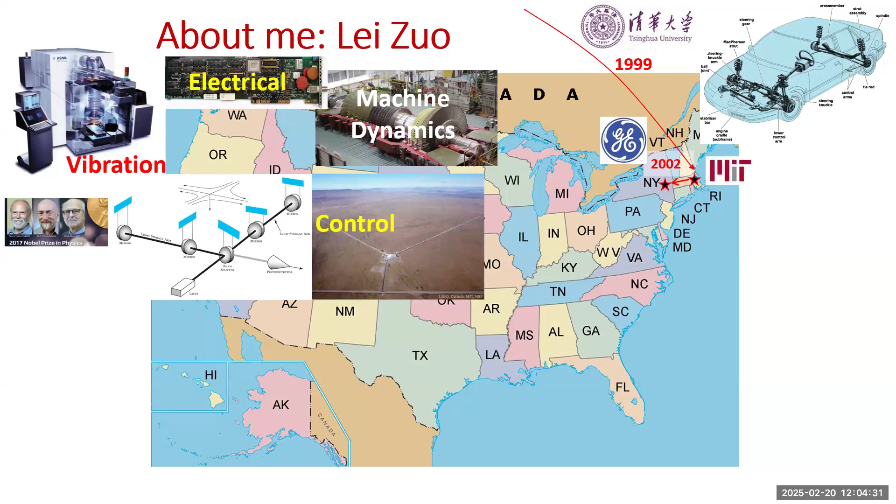So then after finishing my degree, I went to work at a pharmaceutical company in Chicago. There I worked on robotic systems, something like a benchtop chemical reactor, and some projects like brain signal recording, neuron signal. Then I returned to university - first Drexel, then Virginia Tech, then Michigan.

So wow, all this experience, right? Why am I here? When I came back in 2008, I worked on vibration energy harvesting and electronic systems. Then I was center director of the Virginia Tech Energy Harvesting Center. Then I came here. My lab is the Marine Renewable Innovation and Education Lab. So you see my background: car and vibration control, machine dynamics, electronics design.

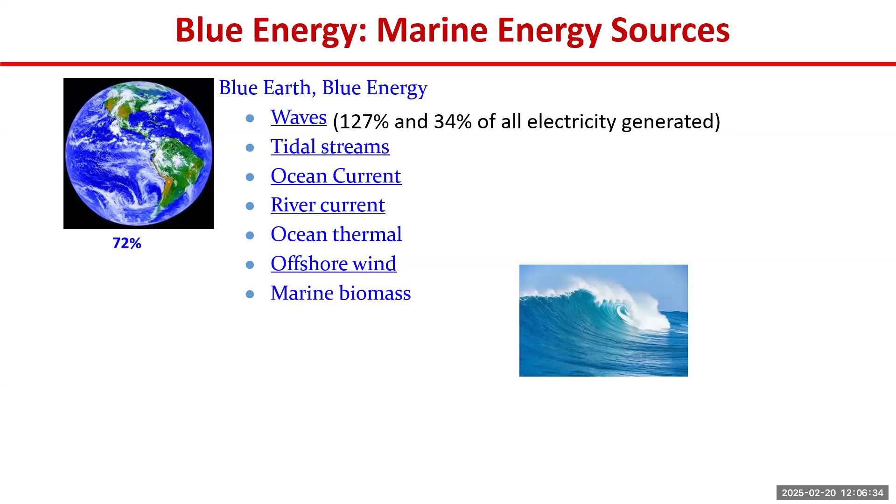Here we talk about marine energy, fluid flow and like that. This picture shows in blue color marine energy using wave, tidal, ocean current, river current, ocean wind, even biomass, right? Given the fact that human beings only act on 30% of that - 70% is water - there's a huge resource we could use. Take ocean wave as an example: wave along the US coastline could power the whole country, considering techno-economic feasibility - especially on the technical feasibility side, we can get 1/3 of electricity from ocean wave. The potential is huge, right?

That is from Falnes, the pioneer, in his published paper. So compare this with solar: when you put solar in the sun, the sunlight is about 1.5 kilowatts per square meter, but accounting for efficiency, you get a couple of watts or a couple hundred watts per square meter. So I want to say wave energy is 10 times denser.

The density is 10 times more than solar.

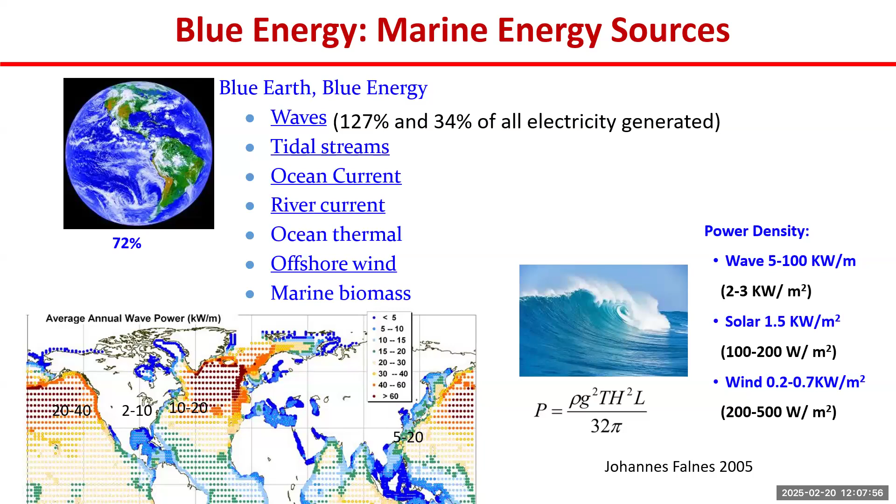The United Nations defined the decade of ocean science for sustainable development. The World Bank has a vision about blue economy, which is basically sustainable use of ocean resources. It includes marine transportation, fishery and aquaculture, and alternative energy from ocean wave, ocean current, biomass, and similar things.

The United States Department of Energy has a vision for powering the blue economy. We can get energy from the ocean, and we can power underwater robots, power fish farms, power seawater mining, power isolated communities, and power water desalination to fight disasters.

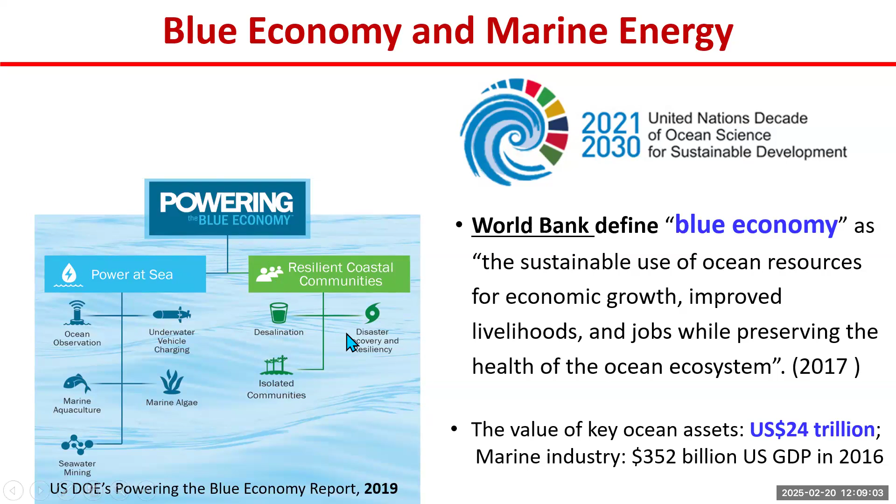Let's talk about ocean wave energy. The first patent was in 1799, in France. For 100 years there was not much progress. In the 1940s, a Japanese researcher used ocean wave energy to power a lighthouse.

Ocean wave energy is driven by the oil price. When the 1970 energy crisis happened, and the 2000 energy crisis, now there's another peak. This energy crisis drives people to think about what the alternative energy could be, and ocean wave comes to the vision.

Looking at the number of people publishing per year - they started in the 1970s, and by 2008 there were already hundreds of papers. Now, in one year, you can probably find 2,000 papers - just imagine every day 3 new papers. This gives you a sense of how active wave energy research is.

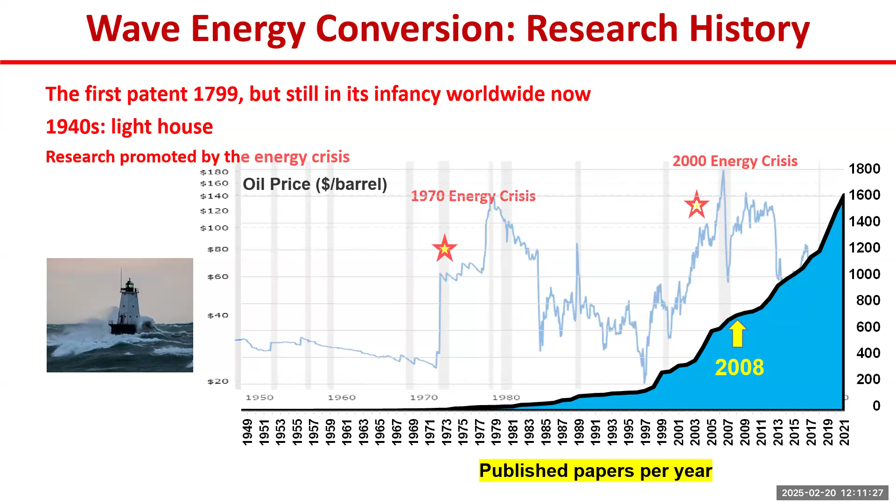2008 was an important year - not because I came back to university, but because in 2008 DOE made its first call for proposals on ocean wave energy and invested $9 million. In 2016, DOE created the Water Power Technology Office with a budget of 45 million.

This figure gives you a sense about the spending. In 2024, last year, it was 141 million dollars. In the first 10 years, this data shows they put 38% of the money to support industry, 1/3 to national labs, and 1/4 to universities.

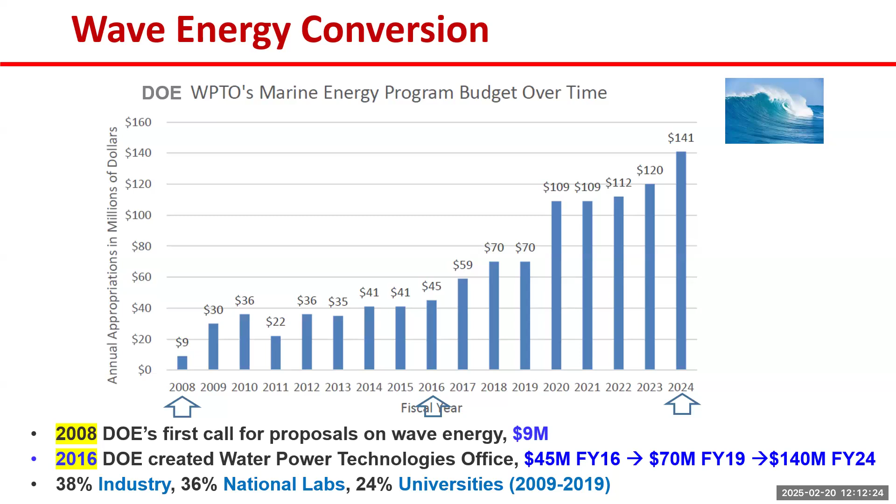After 2019, I feel they invested more on the national lab side, though I don't have data for that. So even if you add together how much we spend, however, if we now talk about ocean wave energy, no one knows what that's about.

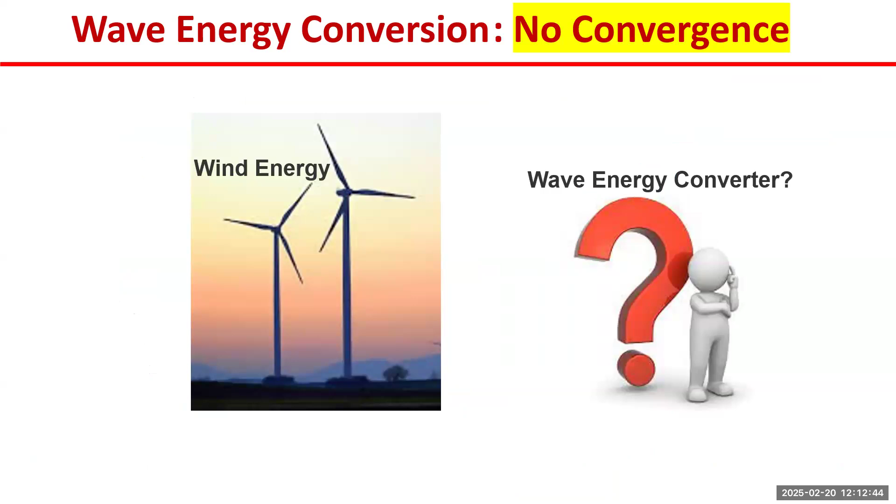Ocean wave energy is different from wind energy. If we say wind energy, you have big towers with 3 blades - you know what that looks like. But with ocean wave energy, you have no idea. The reason is there's no research convergence, and there are so many concepts.

One paper said there are 250 concepts, and another paper did a survey of more than 1,000 concepts. No one knows which one is best - there's no criterion to judge which one is best, no widely accepted criteria. Different people present it in different ways.

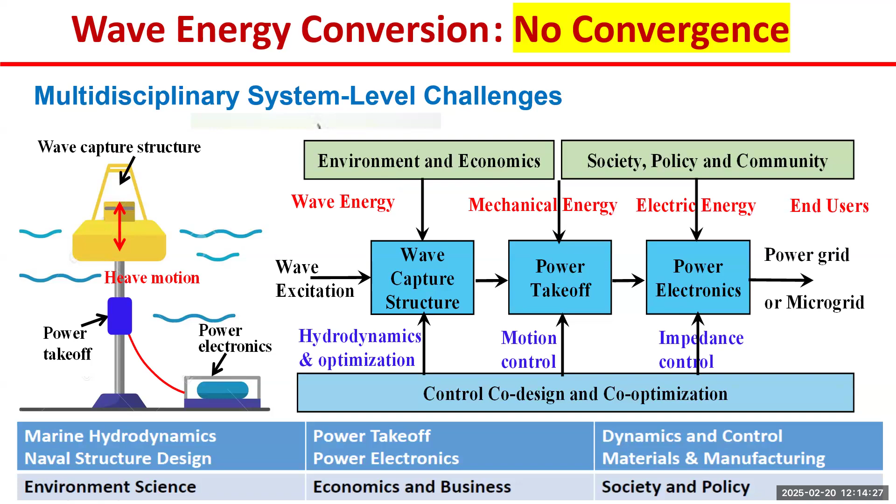However, engineering is not the only consideration - there's also environment, economic, society, policy, and community. So ocean wave energy really needs multidisciplinary research. This is why I'm here - you can see my background includes dynamics, control, electronics, and even machine design, so I want to take my background in this multidisciplinary area to make some contribution in ocean energy.

Later, I got some funding from DOE.

I mentioned DOE 2017, they started the Water Power Technology Office. We got funding to build a 100 kilowatt device, and later we also designed for 100. We did a test in the real ocean, and because it's 100 kilowatts, it's a very large device, 40 to 50 meters.

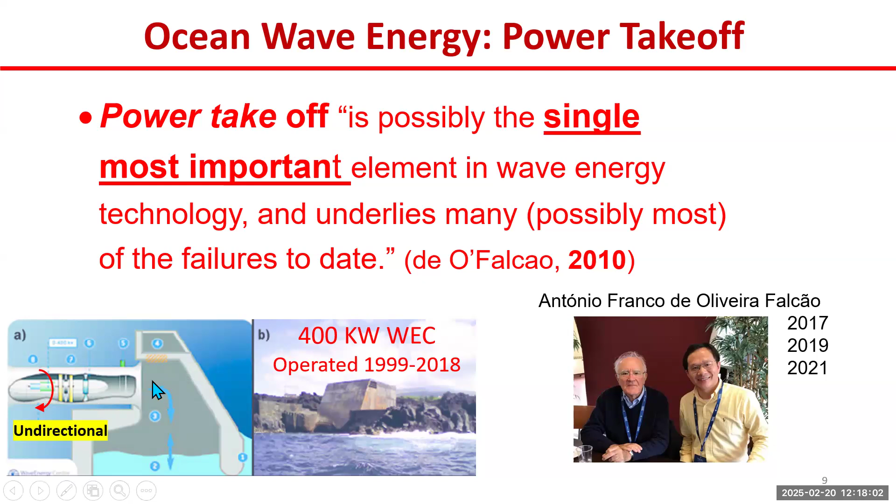It moves up and down, driving a turbine in and out. This is a special turbine that drives the generator into one direction of motion. When he reviewed this, he said the power takeoff is possibly the single most important element in wave energy technology. The power takeoff is the machinery that converts mechanical energy into electricity. Here is a Wells turbine.

Another example: humanity's first trial of a wave energy farm was in 2008 in Portugal. They built a device where wave motion drives a hinge, the hinge drives a piston, and the piston drives fluid. The fluid accumulates in a high pressure accumulator and a low pressure accumulator. They use a check valve to convert the bidirectional motion into single direction rotation. But the device was so complicated that after operating several months it totally failed.

They designed for a 2 megawatt farm. So no matter this design or that design, they want the generator to have single direction rotation, while the wave has bidirectional rotation motion - it can be horizontal or vertical.

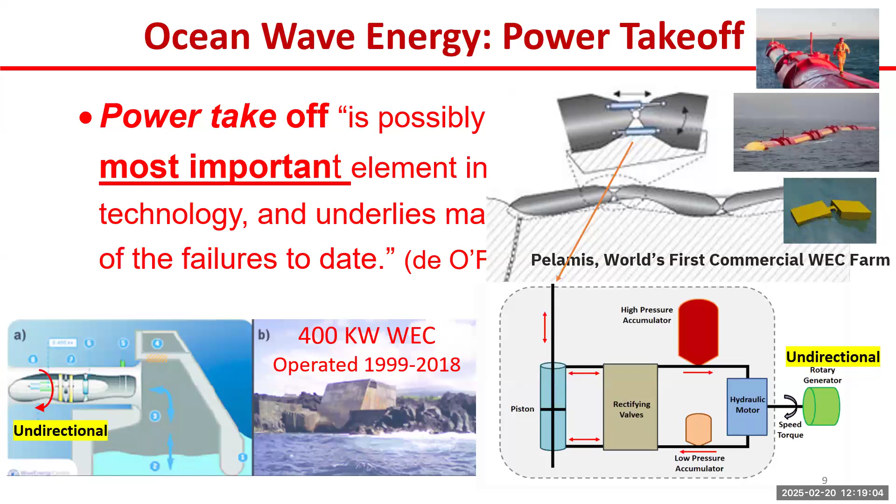Now this is how I brought my design skills into the field and built this kind of prototype. I'll show you first, then show you how it works. You can see this moves up and down, driving the buoy, and we generate energy to power the night light. So what's inside here drives this motion up and down.

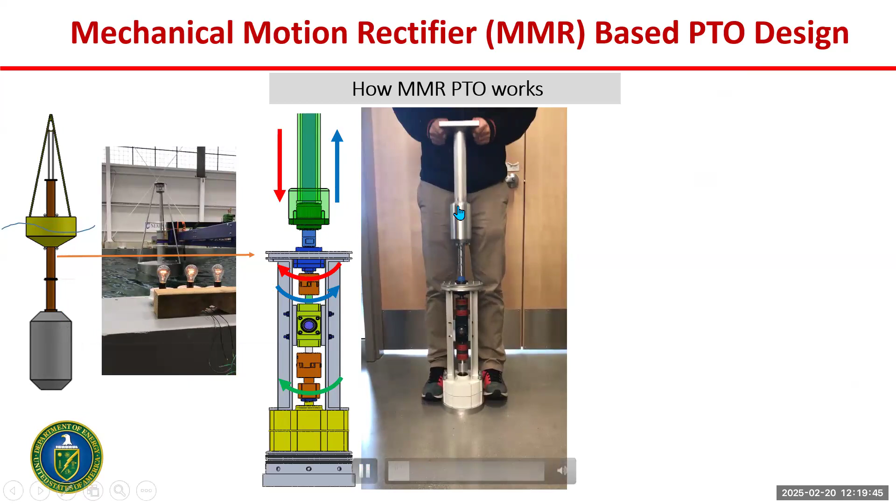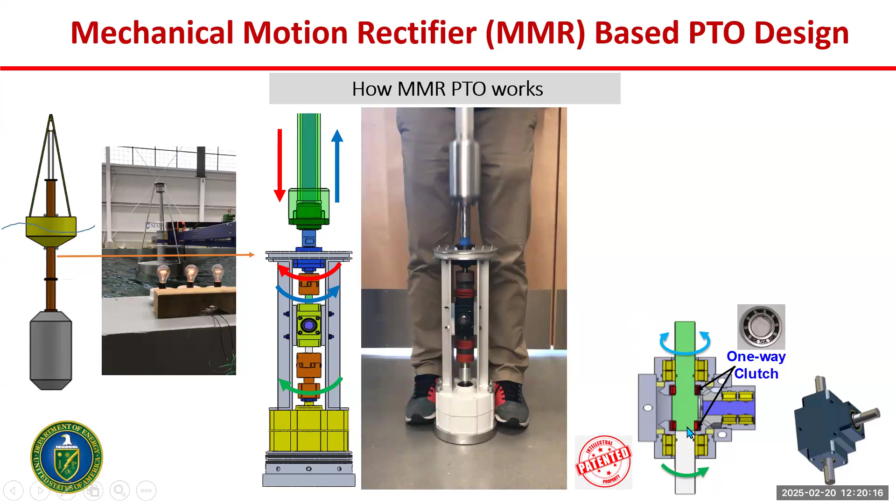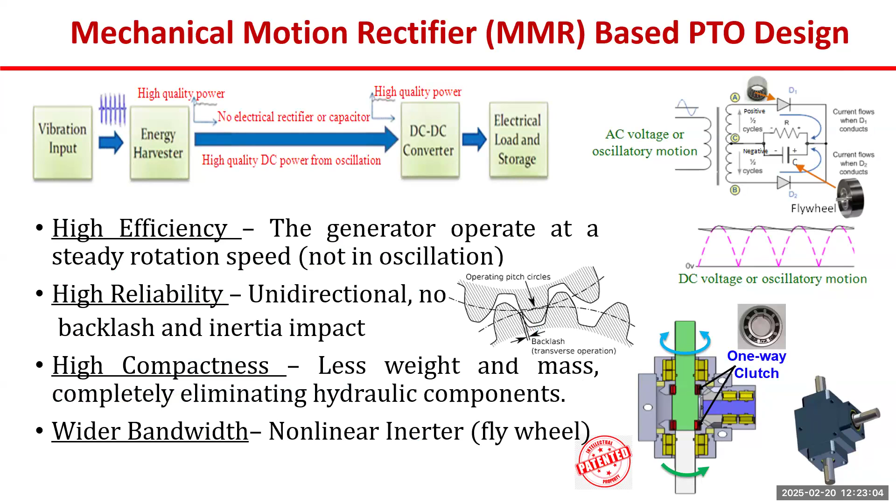Another advantage is this is very compact compared with the hydraulic system. Also, flywheels usually add inertia which hurts our control, but now bigger systems are better because it acts as a capacitor. So then we built these prototypes and tested them 5 meters offshore in the ocean.

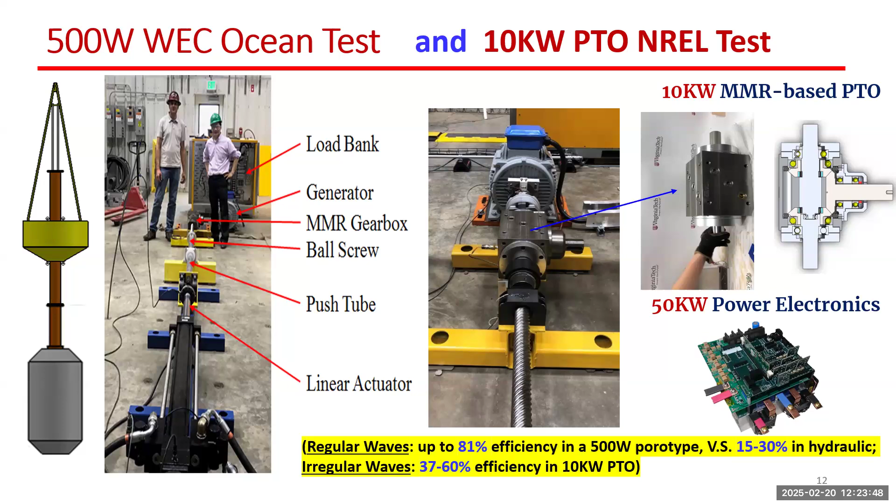Later we also got the chance to build a 10 kilowatt device, with this generator, this gearbox, as well as a 50 kilowatt power electronics system. We got 80% efficiency for this small scale design in regular waves, and for irregular waves we got 37 to 60%.

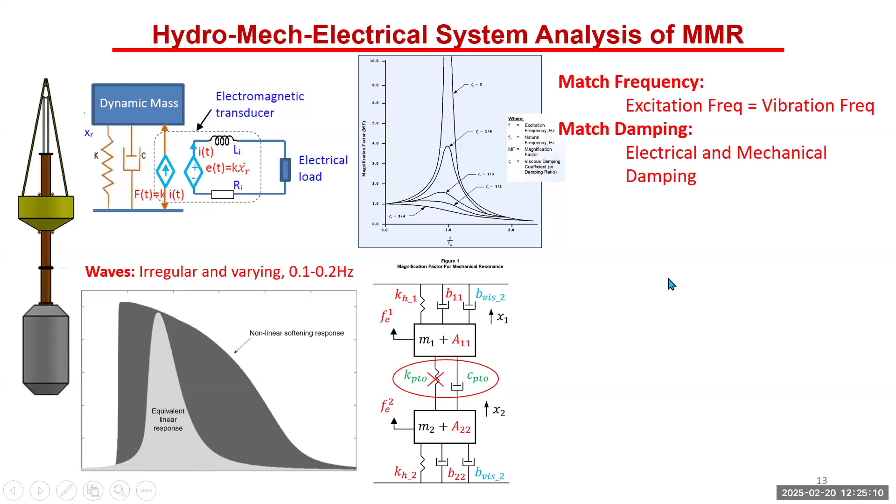Here we introduce another concept: nonlinear mass. What does that mean? You have this moving up and down. Bidirectional, you drive the flywheel into one direction rotation. Clearly, bidirectional into one direction is nonlinear. Another thing, instead of mass, we say inerter. Inerter means when you move this up and side down, there's a force. The force is proportional to the rotational inertia, and it's relative to the relative acceleration between this end and this end.

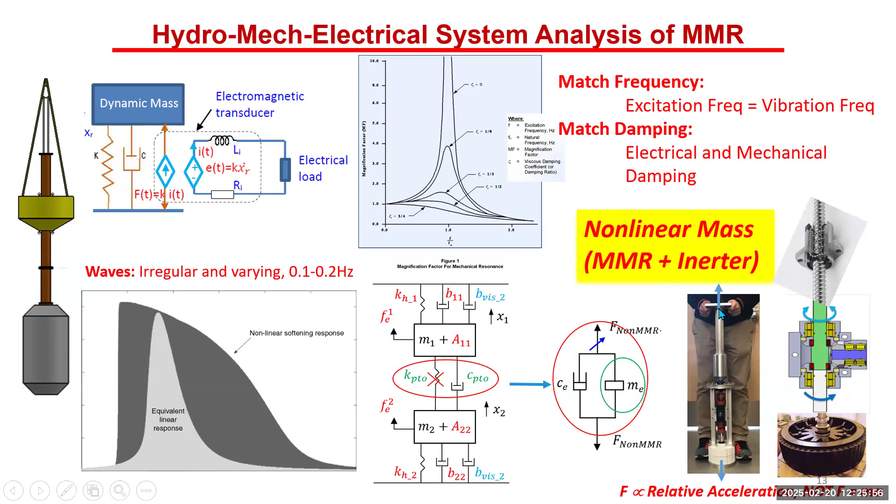So it's called inerter. With this nonlinear mass, we can achieve broad frequency energy conversion, like a two-mass system. You can imagine that way there are two resonances. So now we increase the mass, we get a broader frequency. Another thing is damping and drag damping - this damping effect. If we use a smooth streamline shape, we can decrease the drag, and then we can get a little bit more energy.

So that will give you a sense of how we can use such nonlinear dynamics and also hydrodynamics to improve the power output.

So then in hydrodynamics - the wave energy converter, I said it's a vibration system. In this vibration, there are three unique terms. One is mass, right - mass is added mass. What does added mass mean? Your buoy moves up and down, and the water surrounding the buoy moves up and down also. Such kinetic energy corresponds to the added mass.

The second part is radiation damping. When the buoy moves up and down, it generates waves that propagate out, and wave energy is lost from this buoy. So this is radiation damping. The third is excitation force - you'll encounter excitation force.

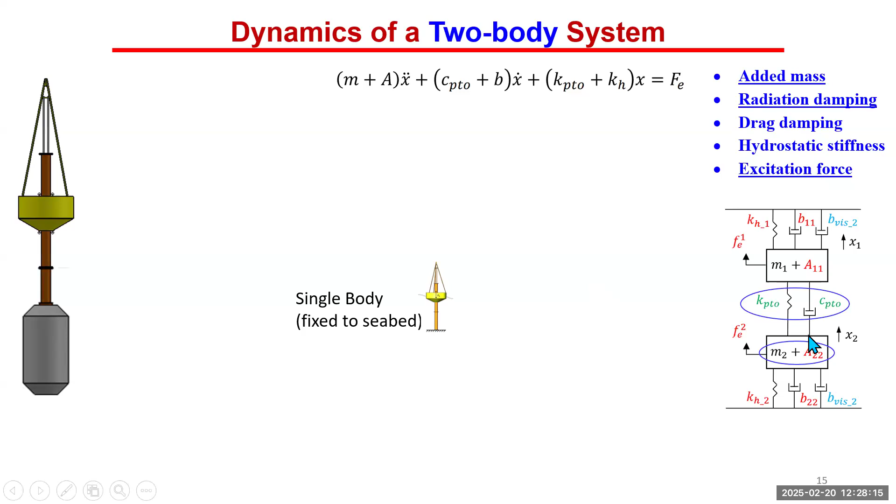Anyway, when you design this, you design the PTO stiffness, PTO damping. You also can choose different mass, second mass. And this is the result we can get - the power output.

So for the single buoy case, that is this case. Or a two-body case, you have different mass ratios. Just imagine that way - if mass is very, very tiny and this moves together, you don't have energy output. And if this mass is very, very large, you'll get the single buoy case. In between, there's the best ratio of this mass ratio. What happened at this best mass ratio? Actually there's physical meaning - it still matches frequency. The only thing is, at this time, the spring stiffness part is zero.

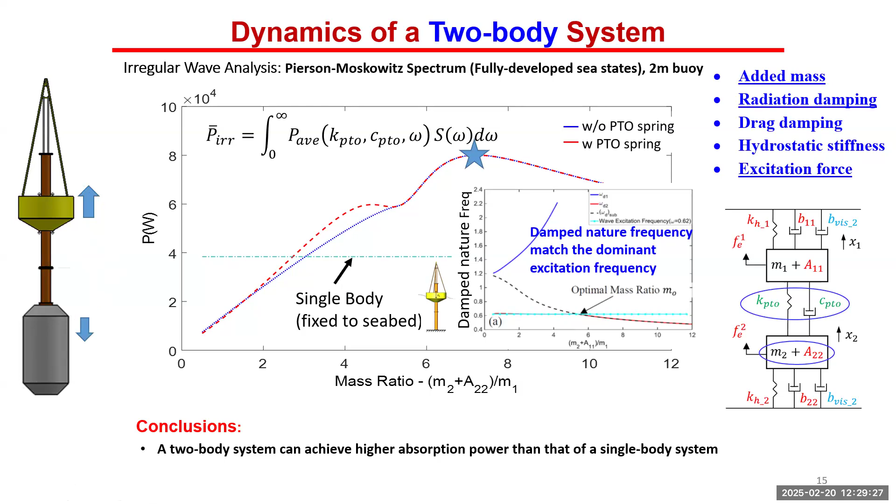We talk about damped natural frequency, and one of the damped natural frequencies matches the excitation frequency. Therefore we get resonance. At this resonance, another thing is the motion shape - the two move out of phase. That means when the buoy moves up, the tank moves down. It generates relative motion, and this relative motion gets more energy output.

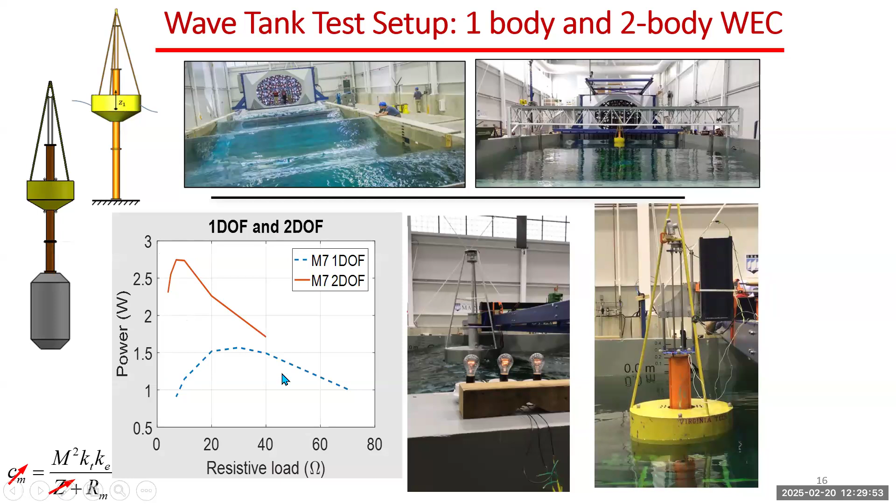So with this tank test, I want to show you this to give you a sense of what I said about relative motion. This is connected to the tank, and this is the buoy. You can see clearly the out-of-phase motion. Because it's out-of-phase motion, the power output can be much more than the single buoy case. So this is it.

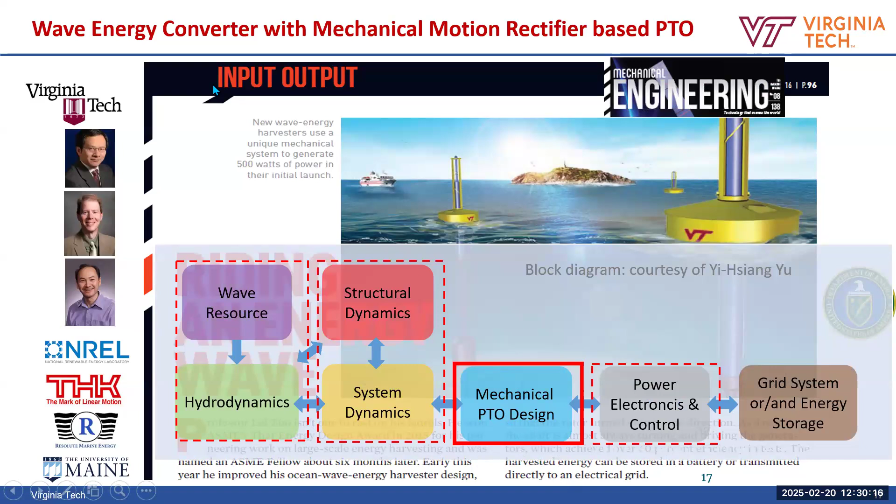We talk about PTO being the most important element. However, once you put everything in the water, you have to consider all the things, from wave resource to structural dynamics, hydrodynamics, and power electronics control. This is ASME Mechanical Engineering magazine's highlight of all our work. Overall, we care about wave-to-wire efficiency, from wave input to mechanical system to electricity output. We have to consider everything.

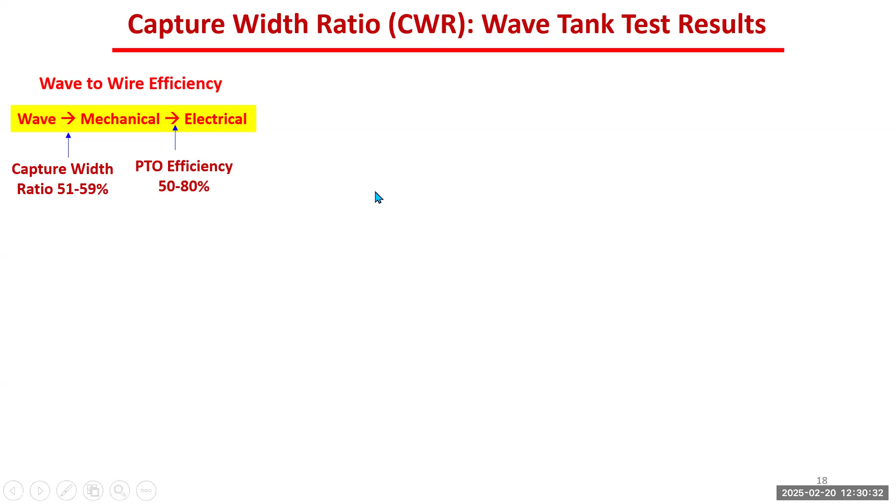So the shape is important, right? Shape is related to capture width ratio. Capture width ratio is how much power input converts into mechanical energy, and it depends on the hydrodynamic design, the shape design. For example, this reference model 3 has been used with a plate, and they add mass through this plate, but this plate introduces extra damping. Here we use a streamline shape, and we can increase the power capture ratio by 2 times. Overall efficiency here, we get about 20% from wave energy to electricity.

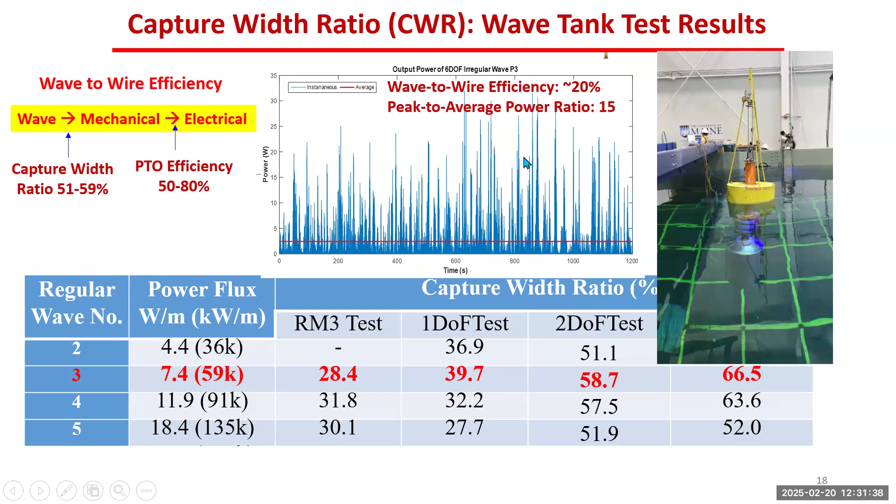So this is the power output in the time domain. Another way to say it: the peak-to-average ratio is very, very large. So you might have an average of 1 kilowatt, but the peak can be 15 kilowatts. This is what I mean. So there's a disadvantage here—you want to make the peak-to-average ratio small. The reason is the peak force corresponds to how large your device needs to be, and that's about money. Average energy relates to economic benefit.

In addition to that, we also did power electronics control. Imagine this generator has an internal inductor and resistor. This is a 3-phase AC to DC converter. Instead of using a diode, we use a controllable switch. Now this inductor becomes part of the AC to DC converter, so we can control the switches and achieve impedance matching.

We talk about impedance matching. Here we have an inductor. If you want a resistor to match this part, it has to complex-conjugate this part, so as a result you'd need to use a pretty large capacitor. With this control, we can achieve cancellation of the inductor effect, taking advantage of this inductor for the AC/DC converter part.

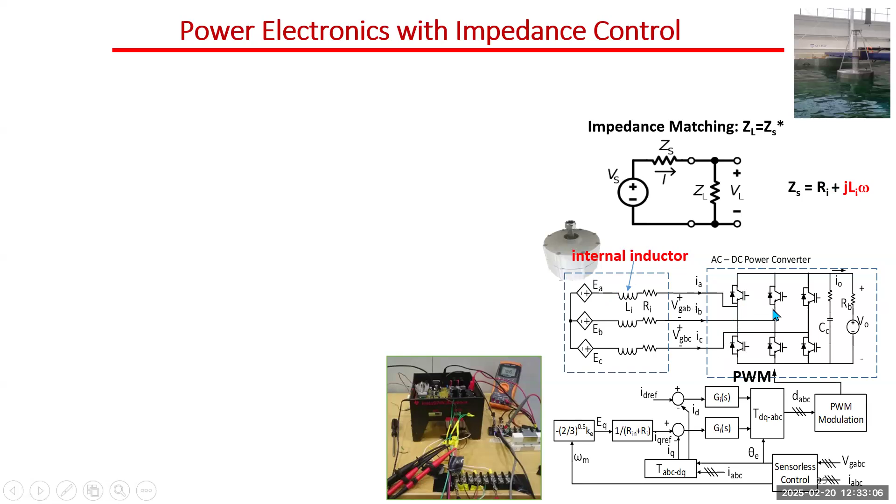Here is an experiment study. You put a resistor here, and maximum you get 10 watts. Here, using the power electronic side in the tank test, we can double the power output. So what I want to say is that the electronics part is important.

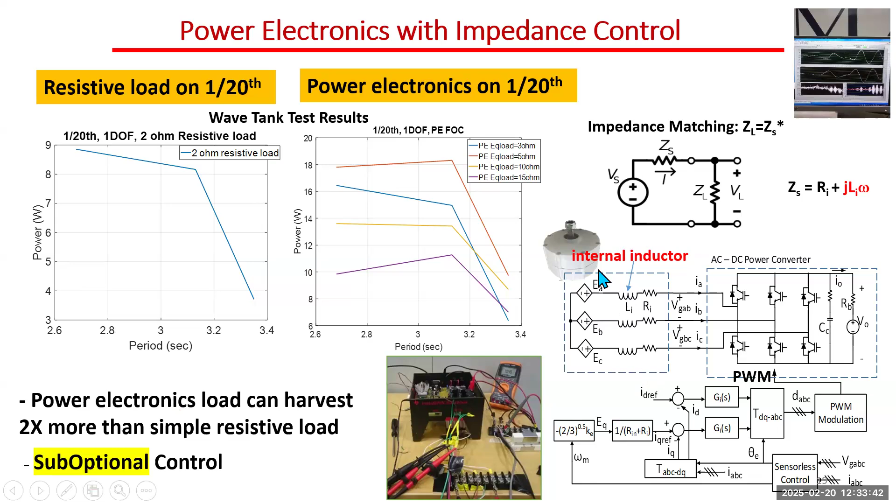But that is still suboptimal control. Why suboptimal? In this system, we only consider the impedance or dynamics of the generator side—we didn't consider the power or the buoy dynamic side. In that sense, the energy only goes in one direction.

So now we talk about the control side. Control usually means active control—sometimes you take energy out, sometimes you put energy back. However, with a one-way clutch, this will hurt us.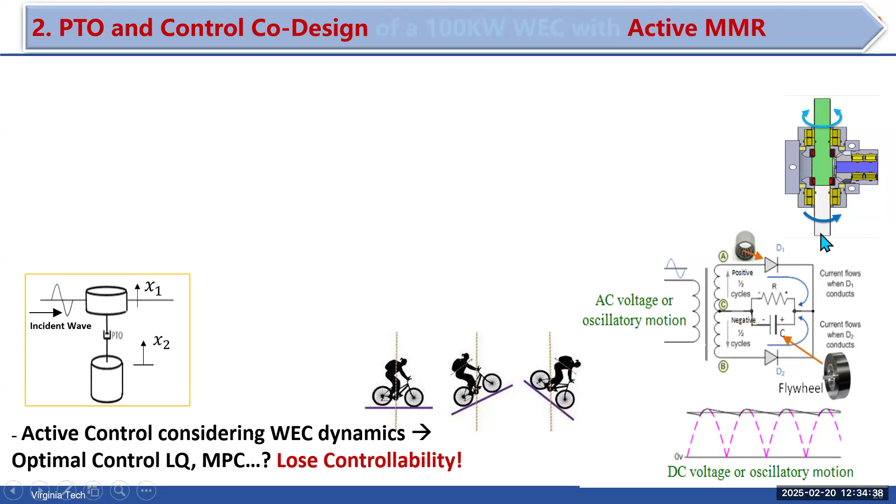Imagine riding a bike: flat road, no problem; uphill, no problem; downhill, you lose control. The reason is your pedal cannot control the wheel. Similarly, when you put this system here—this is the generator, and the upper side is the buoy—your buoy can drive the generator, but the generator cannot drive the buoy. Therefore, we cannot use active control.

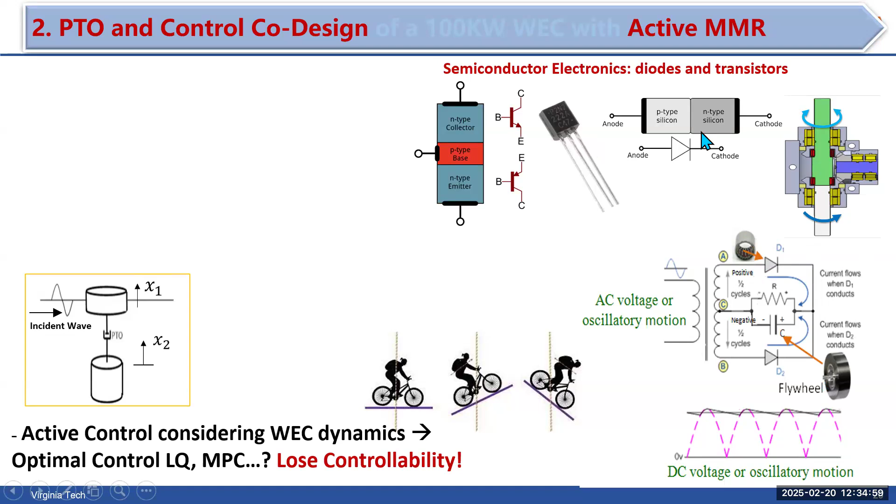So for active control in the electric domain, what we are doing is changing this semiconductor diode into a transistor. Now with this transistor, we can use voltage or current to control the switch on and off. This is the active synchronized electric rectifier.

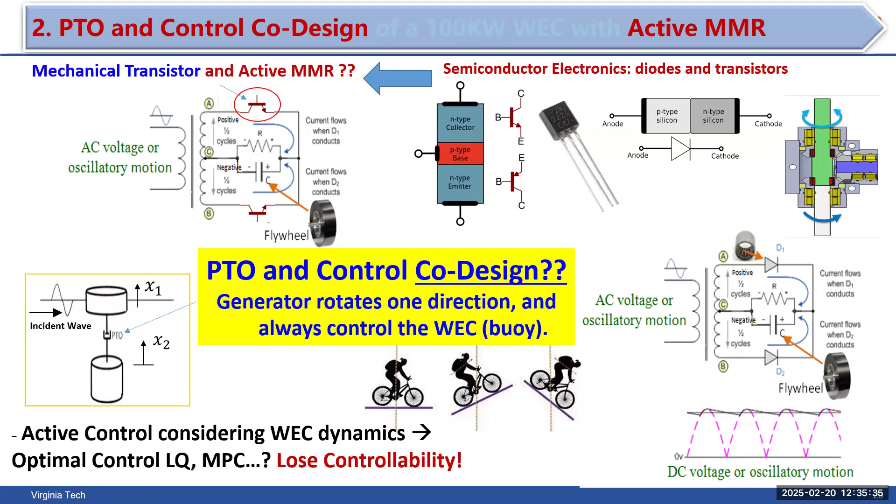Now, can we change this? We can create something in the mechanical domain to achieve a similar active motion rectifier. In that way, the generator always rotates in one direction, and the generator can control the buoy to go up or down. That's the way we achieve active control.

How do we do that? I mentioned I have a car background, so I borrowed another element from the car—the electromagnetic clutch. In a car, there are two types of clutches: one is a manual clutch, like in a manual car; another is an electromagnetic clutch, like for the air conditioner compressor. When you push a button, it engages the compressor—this is the electromagnetic clutch.

Here, we use two electromagnetic clutches to achieve this function. I didn't go through the video fully, what I mean is if this gets engaged, it drives here, and if this moves another direction, we can go through this path. In that way, we can always maintain control instead of losing control.

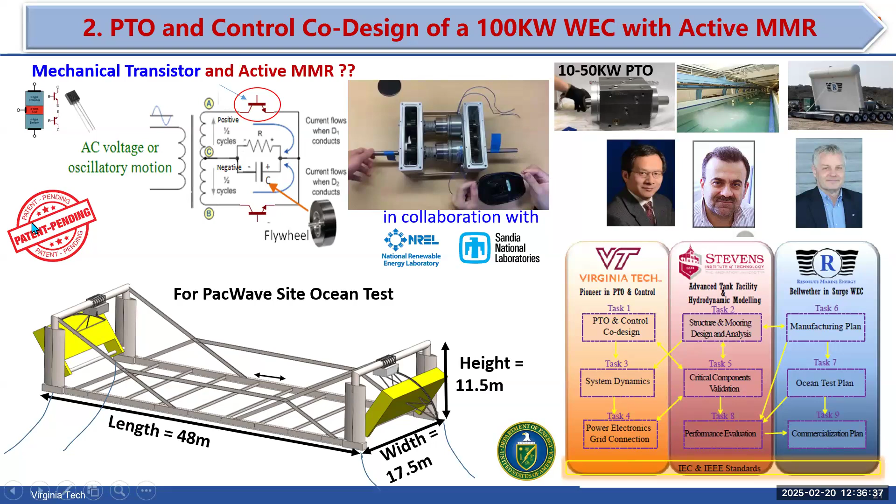So this is another project we work on. As I mentioned, this is a 100 kilowatt wave energy converter design.

In addition to the active motion rectifier, another innovation is the dual flap side. This video shows the result. With a single flap you see almost no motion or rotation. Here with the dual flap, the wave is the same condition, but you have large motion. In that way, the mooring force will be small.

And here, if you can fix this mooring, and fix the bottom, you will see large motion. Now we can use a smaller mooring, so a floating design will be there.

Our third innovation here is about PTO gain. For example, if you have the flap rotate at a given frequency so slow, like 0.1 hertz, and this flap rotates 30 degrees, you can calculate the RPM is about 2 RPM. It's very, very small, like your watch's second pointer at 1 RPM. Now that 2 RPM, your generator needs at least 200 RPM for what you will do.

And you have to put a mechanical engineer on it. I say it's easy, right? Just put gears. Yes, you put gears, but what happens? Efficiency loss, right? The torque increases, and as a result you have to make your gear very, very bulky.

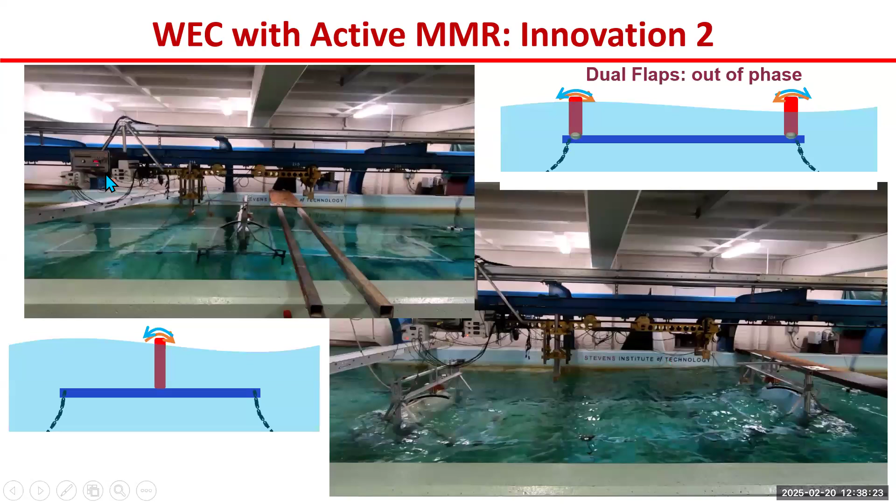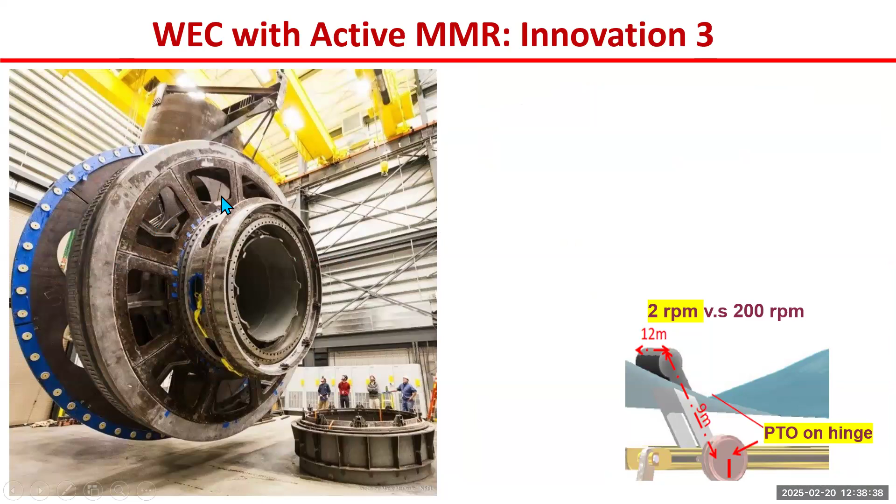So what do we do now? This is the design. Instead of using a gear, or putting a huge generator - this company put a 5 meter generator, so when this generator was initially tested in the dynamometer area, they couldn't get it into the room because it was too large - so anyway, our design, we put this generator here, and we put an arc.

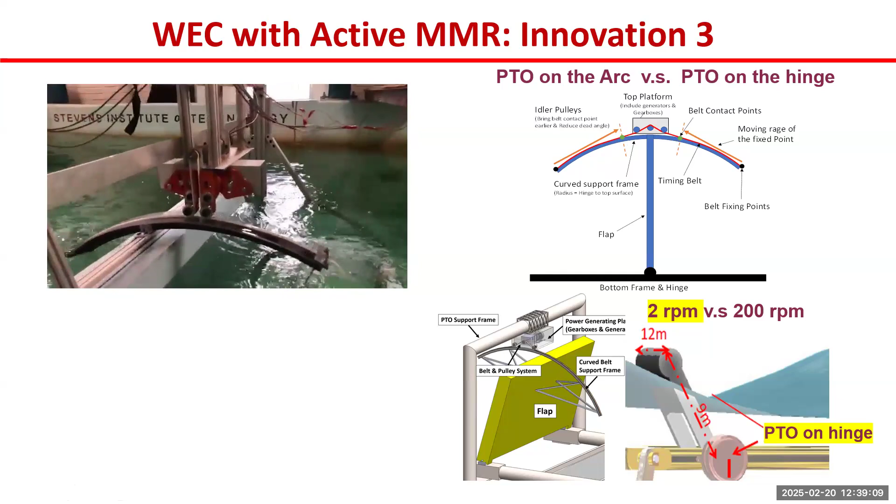During the arc motion, we have a belt, right? This looks like the arc is a large pulley, this is a small pulley. In that way, we can significantly magnify the motion. The flap motion drives the belt, and drives another small pulley. As a result, from this very small motion, we can quickly increase the speed. So we don't need another gear.

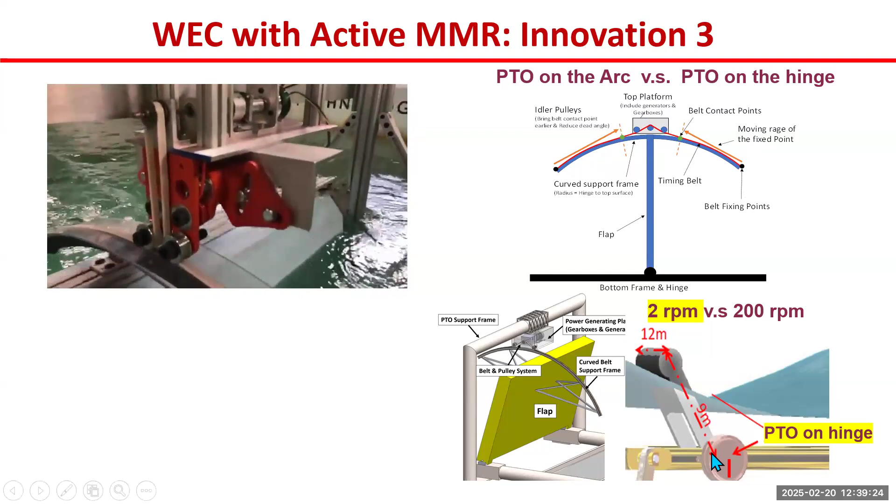Another thing, everything is in the air. You don't need maintenance, everything will be easier instead of putting it in the water.

So we finished this design to make the target at the ocean test in the Pacific wave site, under construction on the west coast. DOE invested $100 million to build the test site. This is what we designed for the test site.

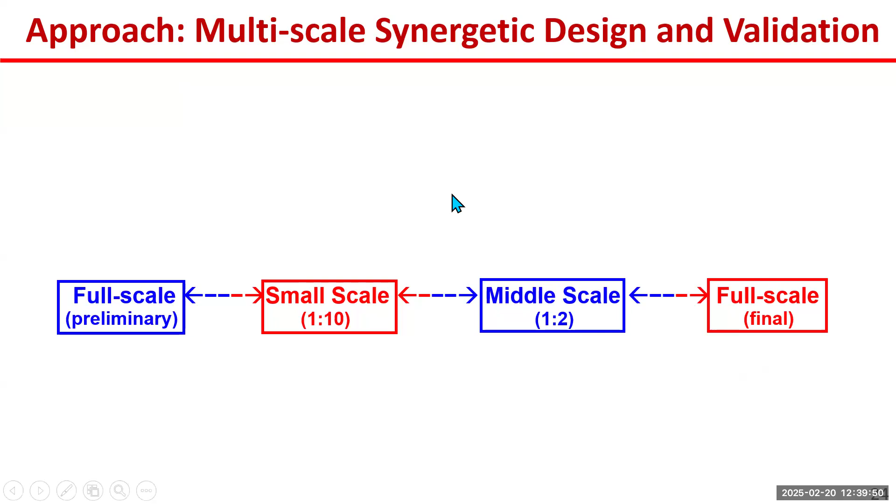So we do multi-scale design. Basically we did full-scale system design first, looking into hydrodynamics. And then we built a 1 to 10 scale small device and tested and validated it in a tank. I also designed the active motion rectifier PTO side. We did 1 to 2 scale PTO - if full scale is 100 kilowatts, the 1 to 2 scale is 5 kilowatts. Anyone can tell me why it's not 50 kilowatts?

There's no... okay, so if you know fluids, you know the scaling law, right? The power and scaling is 3.5 times, from the scaling law.

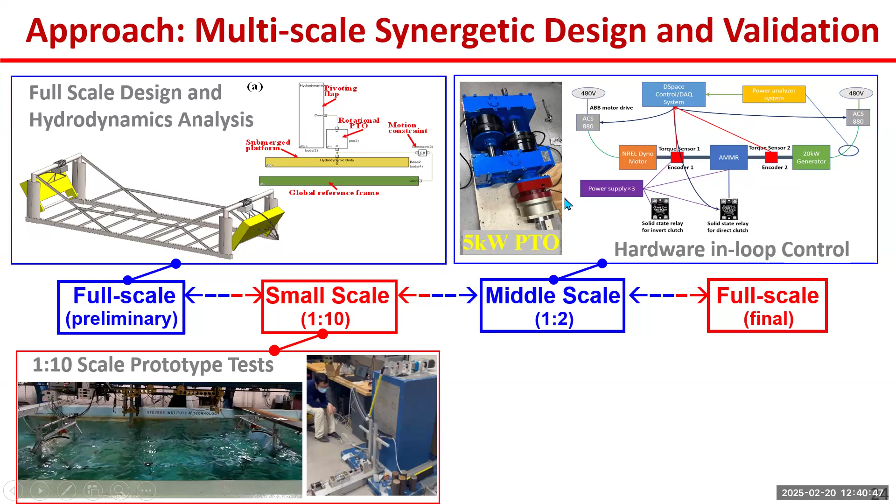So we are testing this ongoing, actually at NREL right now, and we'll complete this month. And then we have a third party, like ABS, who did the design review for us, giving us feedback about structural integrity and FEA analysis to identify any potential damage.

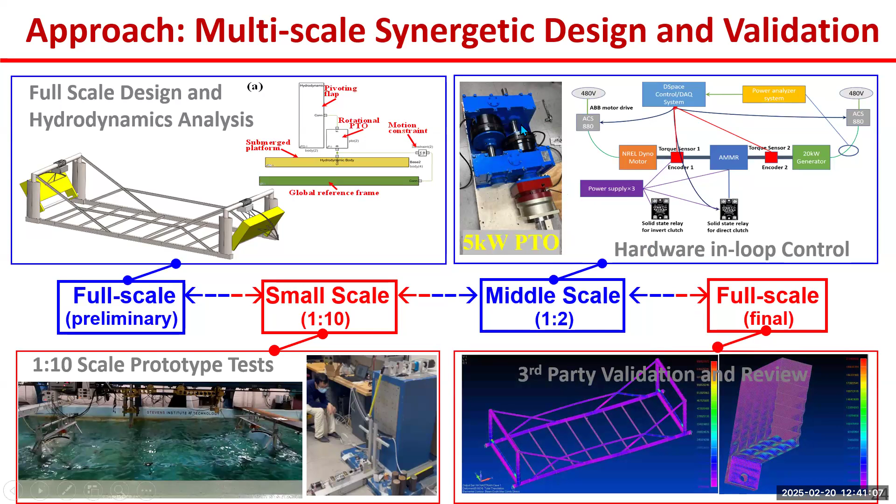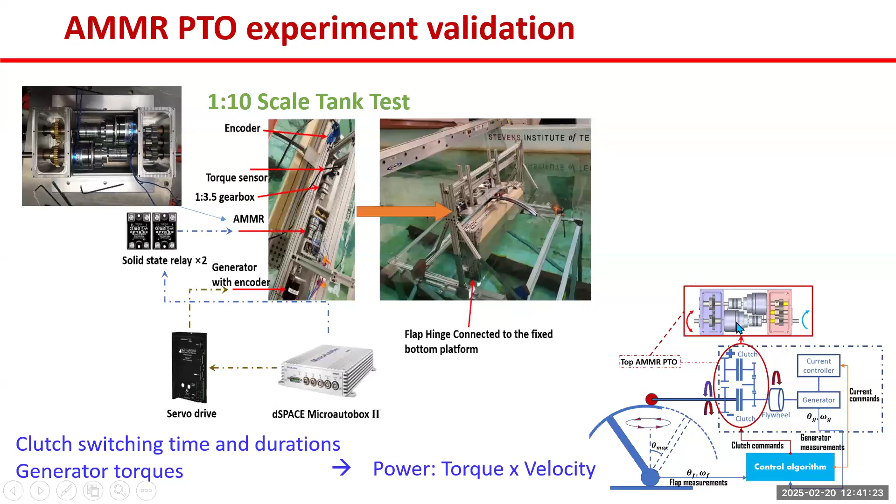So we also implement the control side. This is in collaboration with Sandia National Lab. Now the control has two parts: one is controlling the switching - I told you about the two electromagnetic clutches - and also controlling the generator torque. This involves system identification, frequency response, and then we design the control loop.

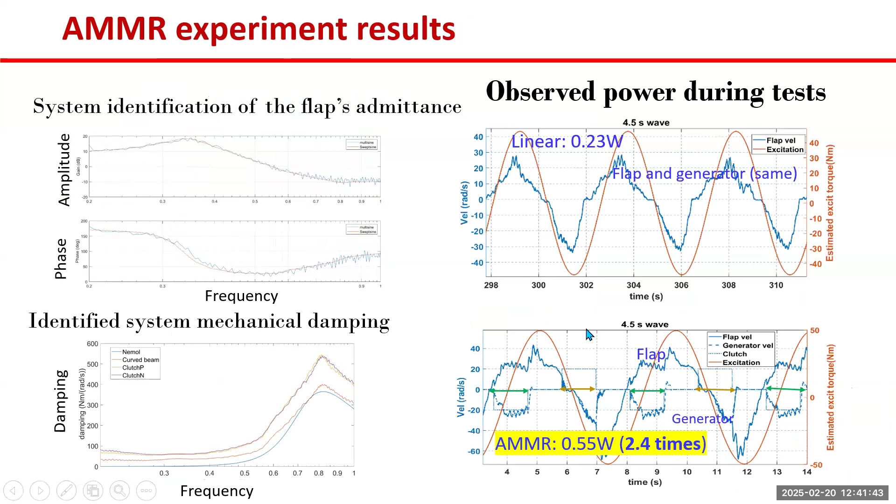Overall, I want to say the active motion rectifier compared with the traditional system can double the power output, 2.4 times. So I gave you one example.

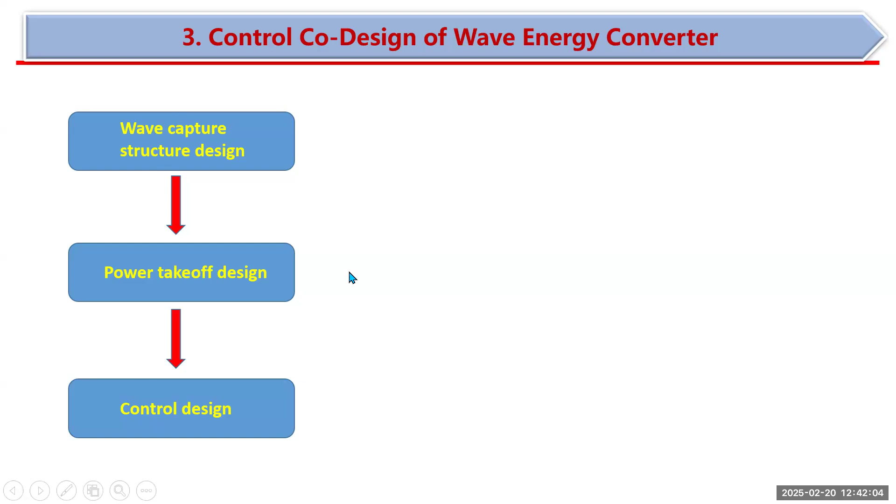We are excited about the mechanical motion rectifier. Later we found this problem: we cannot implement control. The reason is we did the design in series, not in parallel. Ideally, when you design a system, we need to consider everything together from the structure side to the PTO side to the control.

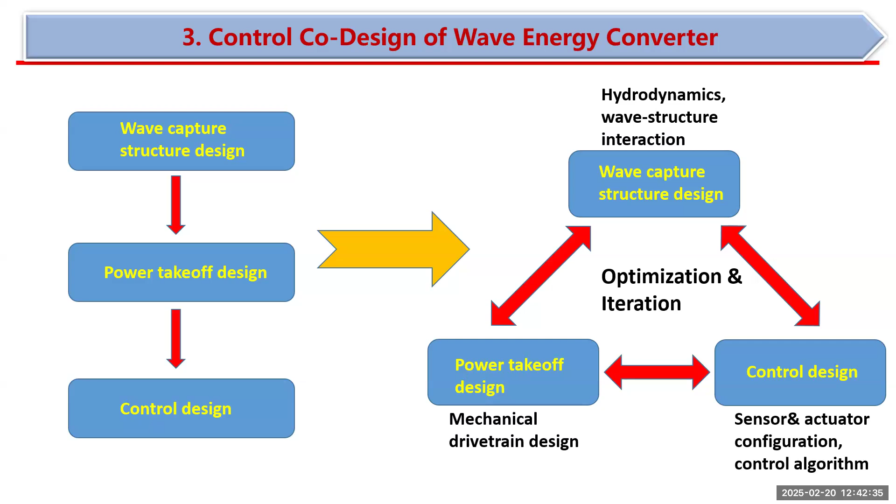Now, the optimization people say, okay, I have multidisciplinary optimization. So I call it engineering co-design. What does engineering co-design mean? You have, for example, this flap type of wave energy converter, not full.

Here you have the hydrodynamic system, you have the electromechanical system, then you have a generator like that. If you consider everything in the modeling, you call this mechanical impedance here, and this is also impedance here, generator part and control part.

Now control co-design means you design all the mechanical system to have maximum power output, right? And maximum power electric output doesn't mean you have the maximum mechanical input.

For example, a lot of people say, okay, you have a swing set, right? You push it always in the same direction. Or you design the hydrodynamic system so that the force is in line with the same direction as velocity. That is actually mechanic input - you have maximum mechanic input.

However, if you have some dynamics in the system which introduce a phase difference or introduce damping like that, and you maximize the mechanical input, your electric output may not be best.

Therefore, the true co-design, we highlight the output side. We design every element and all the controller so that the voltage and current are in phase, instead of velocity and force in phase.

So I want to say that I worked in the pharmaceutical company for 4 years. Pharmaceutical research process, right? Usually, for example, COVID happened. Then they identify some protein or whatever tissue that can be attacked by the virus.

That's the target, right? Then they screen all kinds of compounds, millions of compounds, to see which one can interact with the target. If it can interact with the target, it's called a hit. After that, they do certain optimization, and that's lead. Eventually, a couple of drugs can go to clinical trial.

Clinical trial is very, very costly, right? So now, what's the relationship between this and our wave energy research?

Okay, so this is totally different. A lot of wave energy researchers, and companies, you have some technology, you file a patent, right? You want to say, okay, the technology I want to commercialize, I want to use - the wave energy is technology driven. Pharmaceutical industry is not technology driven.

It doesn't mean one guy invents one compound and wants to make a drug - you wouldn't do so, it's totally different. That is more like a market pull approach. You identify the need, then you look into the solution.

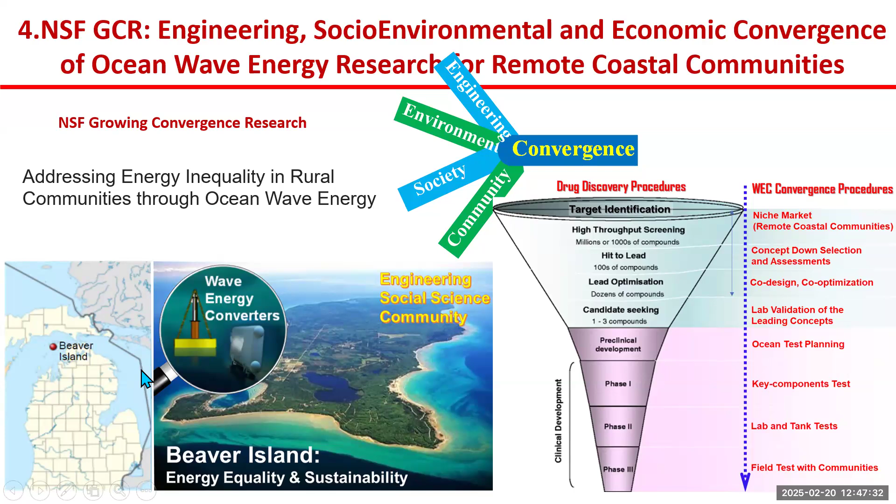So this is research convergence. We have a new project we're working on. Specifically, in a previous small project, we worked with Beaver Island to drive the research convergence.

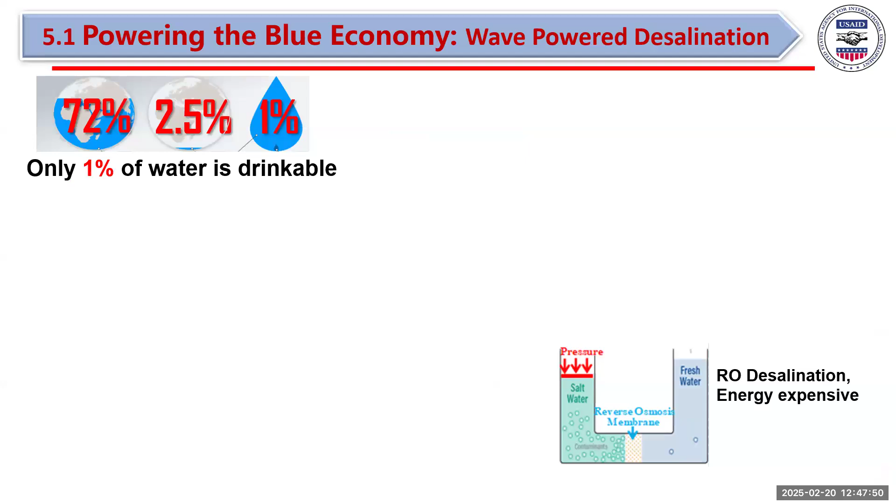Now most of my research - let me say our research also covers some other parts. Now I'll go through this quickly, like water desalination.

Basically, we have a wave energy converter powering a hydraulic pump, hydraulic flow going through the membrane side to get fresh water. That is the test we did in the tank. Here, the fresh water comes out here and brine comes out here. This figure shows how it works.

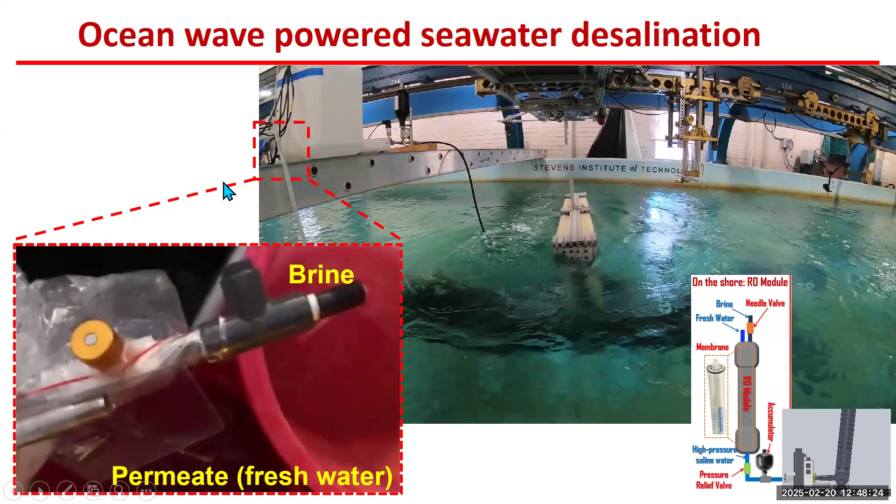The piston pump drive brings everything to the high pressure side. So we can use energy to produce fresh water, and we can use fresh water to produce food, right?

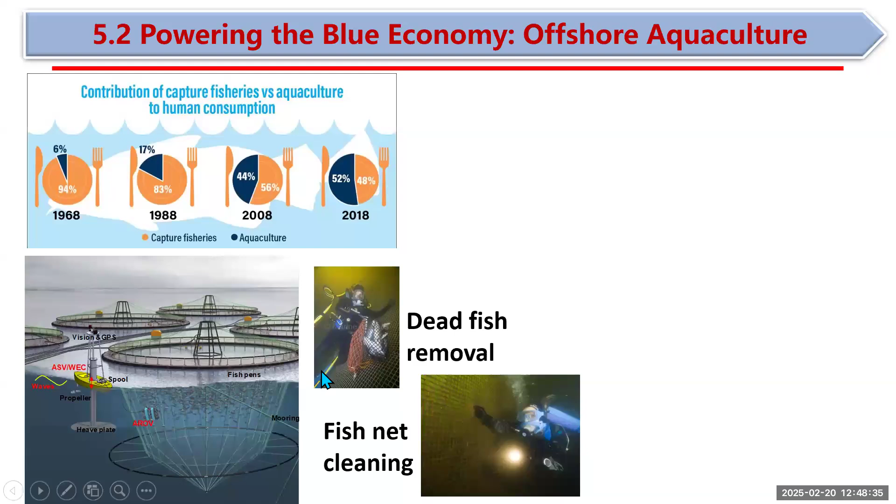So another thing to consider is food. There's also seafood, right? Nowadays, more than half of our seafood comes from aquaculture.

The idea in this project is funded by USDA. We did a survey about US aquaculture and found two most important things: one is keeping the fish farm clean, and another is dead fish removal. If a fish dies and you don't remove it, bigger animals will come and damage the net.

Currently they use divers to do this work. Instead of using divers, we want to develop a robotic system that uses energy from the ocean to clean the nets.

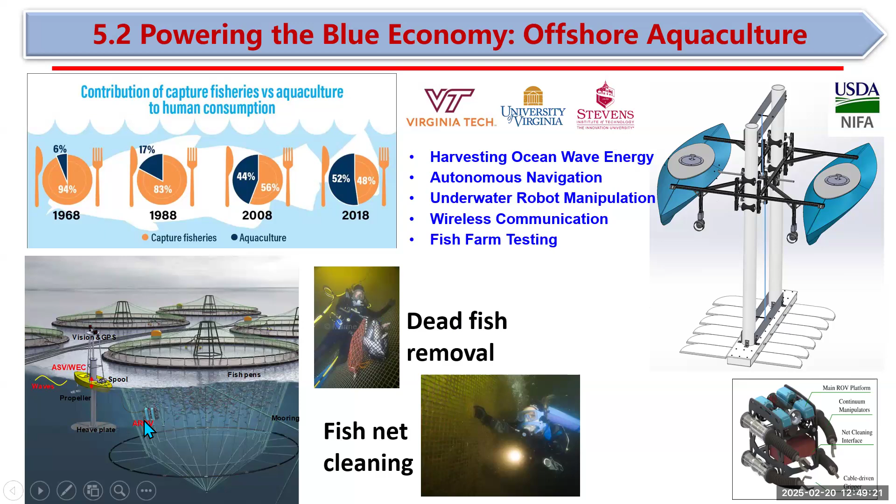This is for the wave energy converter. There's a special design here - we use a cable driven PTO. This is the prototype we built. It moves up and down, and that drives the cable. The cable drives the generator.

So we did a tank test again. Students built this for the test lake.

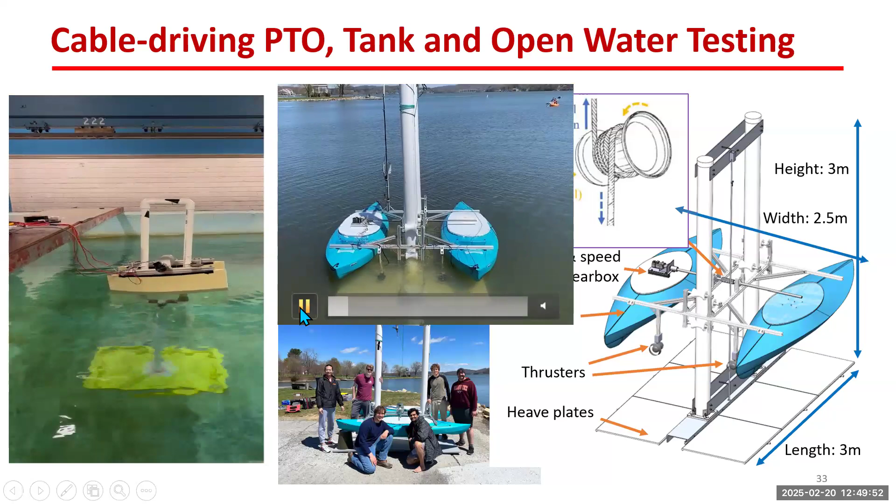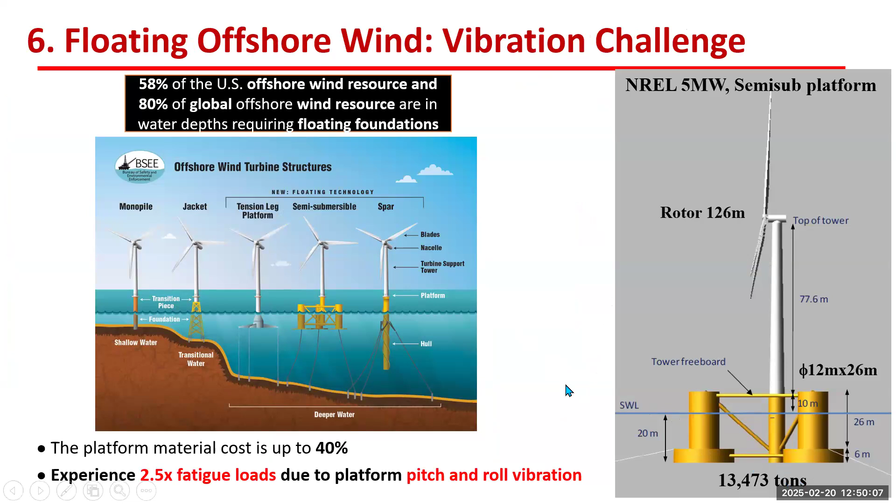We also work on the offshore wind energy side. In terms of offshore wind, the most important thing is the platform, and the platform compared with land-based systems has motion vibration issues.

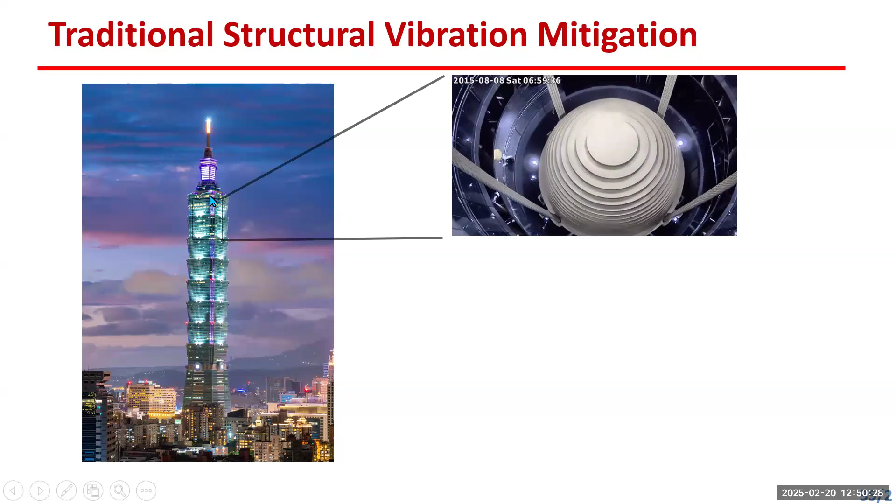So the idea here is vibration reduction, like in tall buildings - I mentioned my first federally funded project on how to harvest energy from tall buildings. In earthquakes or wind, a big ball is put there to reduce vibration. That's called a tuned damper. Because it's a small mass, the vibration gets reduced.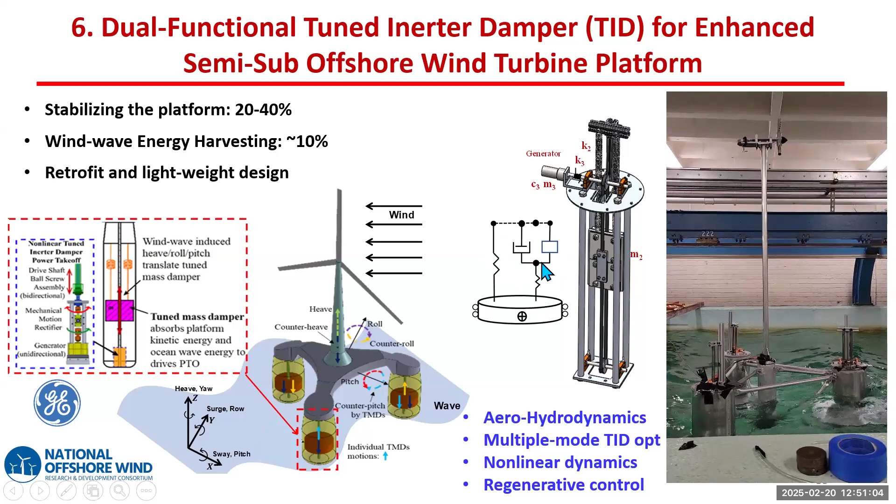There's some uniqueness here - I mentioned the inerter. Instead of a tuned damper, this is a tuned inerter damper, and we can significantly reduce the mass to half. As I mentioned, type 1 has 600 tons of mass - you can imagine reducing that to half.

We also have an ongoing project using vortex-induced vibration to reduce issues in the subsea cable. Subsea cables contribute 80% of the energy loss. According to insurance companies' data, 80% of claimed losses are because of subsea cables. Subsea cable vibration is important.

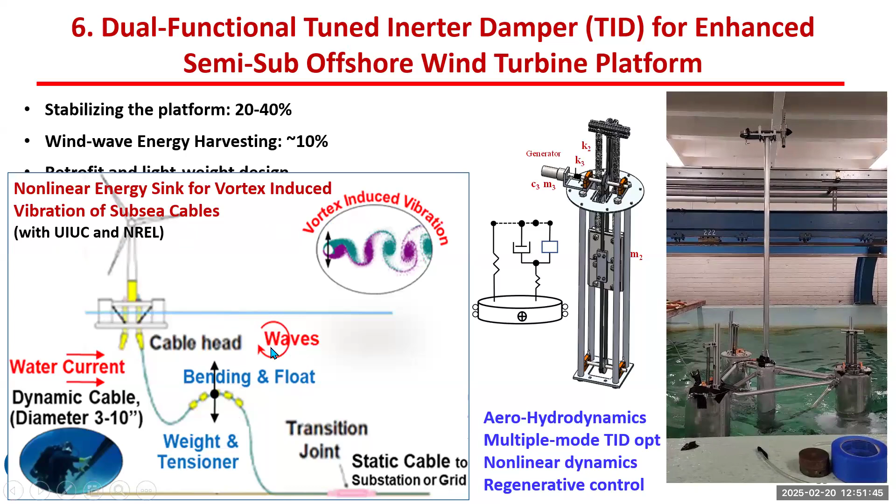Vortex induced vibration - we collaborated with UIUC and NREL to work on the solution. It's more like a nonlinear energy sink for this vibration reduction.

We have one project to reduce the noise in pile driving. Pile driving - just imagine the pile can be 10 meters - you have a huge hammer hitting it, generating noise that can kill fish. So now we use metamaterial in the water and in the seabed to reduce the vibration.

We have to acknowledge that US marine energy is really behind other countries, including Europe and even some Asian countries. Therefore, we have a lot of collaboration with European countries. In the next 3 years, every year we can send up to 8 students to European countries, where they stay for the summer - we pay their airfare and salary.

Last year, we also took all my students to Taiwan, and we pay the students to travel or whatever like that.

On the education side, I put education as a key part of my lab because education is a very important part.

One part I want to highlight is professional skills. We usually train our students very well in technical skills, but we didn't teach them well enough in commercialization, entrepreneurship, public speaking, leadership, and similar skills. We hope we can train our students with these soft skills, or professional skills.

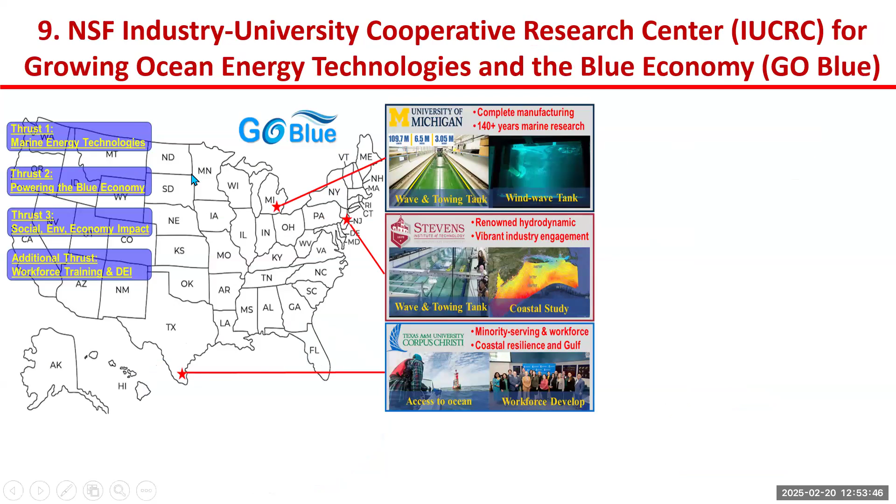We also created the Go Blue Center - it's an industry-university collaborative center with sites in Stevens and in Texas. This is mostly industry-driven project work - basically industry gives us funding to work on problems. We have a multidisciplinary team, including Professor Asha Seren here too.

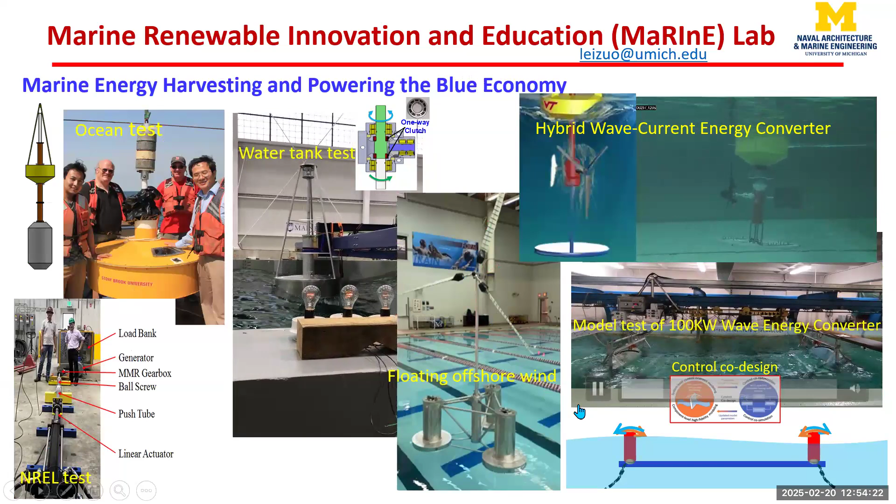Overall, this is what's going on in the group. I mentioned the hardware side, and I didn't talk too deeply into each topic area. So I want to draw a conclusion: there's huge energy potential available from the ocean.

We need really multidisciplinary research to make that happen. The playground is not enough, and everyone can find something to do on this topic. We need to keep our eyes open, keep our mind open, and acknowledge our knowledge is limited to handle things in the ocean. We have to accept other people's ideas and think, acknowledge our idea may not be right or even totally wrong. Open mind collaboration.

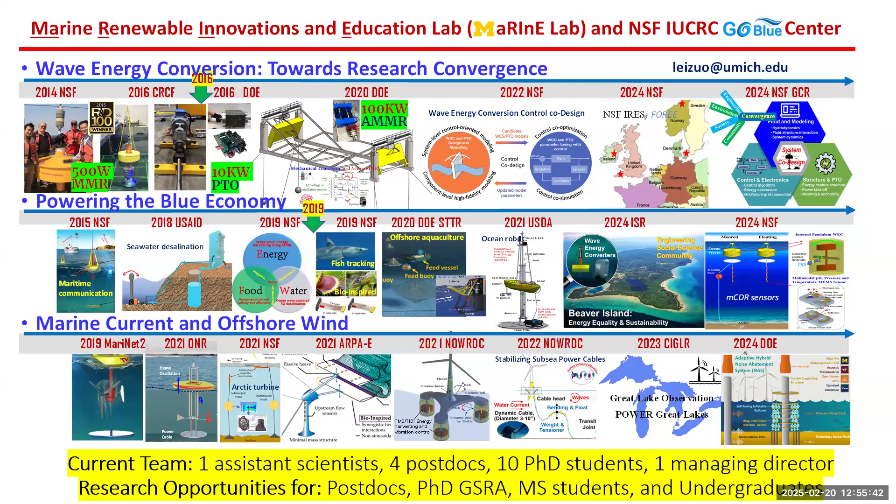We need to train our students not only in engineering skills, but also teach them social science, business and professional skills. My team is relatively large, I should update: have a research scientist, one postdoc left, okay, and 4 postdocs, 9 PhD students, 4 masters students, and I have quite a few projects we need students and postdocs on.

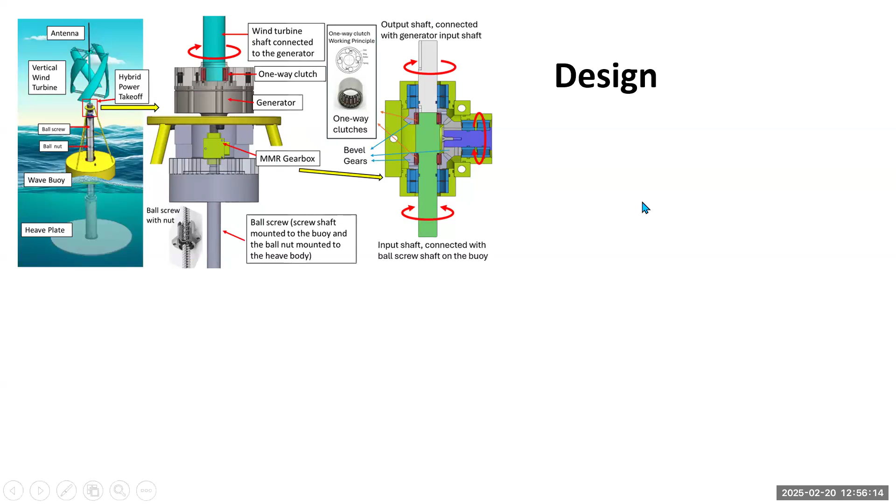I want to quickly highlight one design project, funded by NOAA. We want to design something that can harvest energy from wind and wave to power Great Lakes. You put a buoy there, wintertime covered with snow, and it wouldn't work. So this design work covers ocean monitoring and small buoy design on the wave energy side.

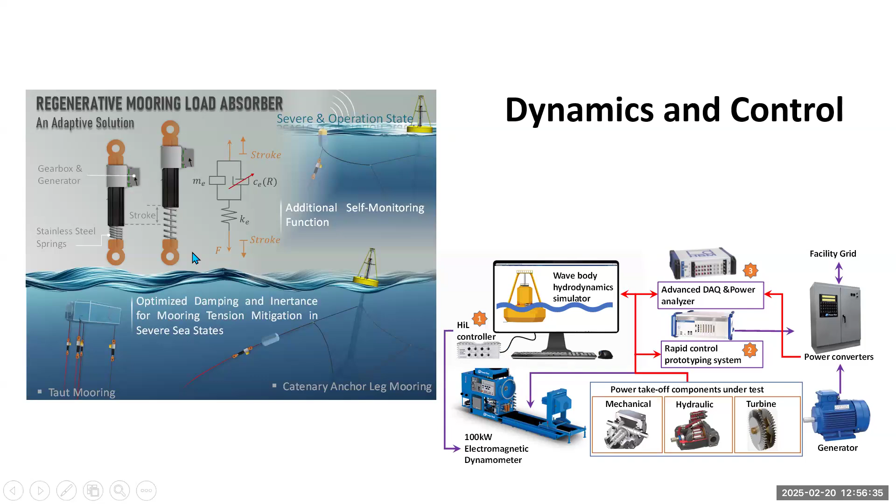Another thing is the dynamics and control. We are in the process - DOE provided us $1 million to design a hardware-in-the-loop system to test things in the lab, which needs control. We also have a project to design the mooring system, the mooring absorber side.

When I talked with Professor Maharsh, I said okay, we can have one postdoc work on this hydrofoil project. The two hydrofoils look similar - what's the difference? Actually they are totally different. This one is more like a kite. You use a cable when the ocean wave is a surface wave, in deep ocean. A half wavelength deep, 20 meters or below, there's almost no wave motion. So the idea here is more like a kite.

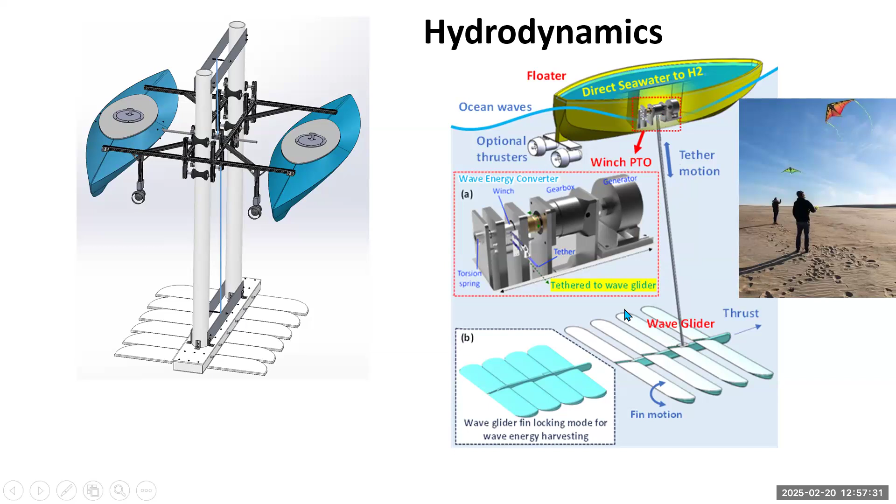When the wave drives this buoy to move up and down, it gives force. This force drives the kite to move - similar to here. So this is different, this is for shallow water. In shallow water, the wave drives and provides propulsion force, similar to how a whale uses its tail to ride the wave and drive forward. So the two look the same, but the mechanism and hydrodynamic side are totally different.

I hope some of you guys can join us and look into this program. Professor Maharsh has been nice to give total support on this project, but I still haven't identified the right person for it yet. Okay, so I'll stop here. Sorry for taking longer time.

For the energy extracting device, how far out from the shore do you have to take it in the ocean? It depends on the water depth, and also depends on the device. For a wave-surged plate type thing, we mostly generate energy from horizontal motion, so shallow water would be better. In deep water, the wave is circular; in shallow water it's like that.

So does the orientation matter? Yes or no - for a flat design, the orientation matters. Imagine the wave will drive here and drive in this direction. We did some simulation - plus or minus 30 degrees, it wouldn't change much. If you change 45 degrees, the power is significantly reduced. However, if you put a buoy in the water, orientation doesn't matter - the wave comes in this direction or that direction, it's the same. This is called a point absorber because it looks like a point, it doesn't matter which direction.

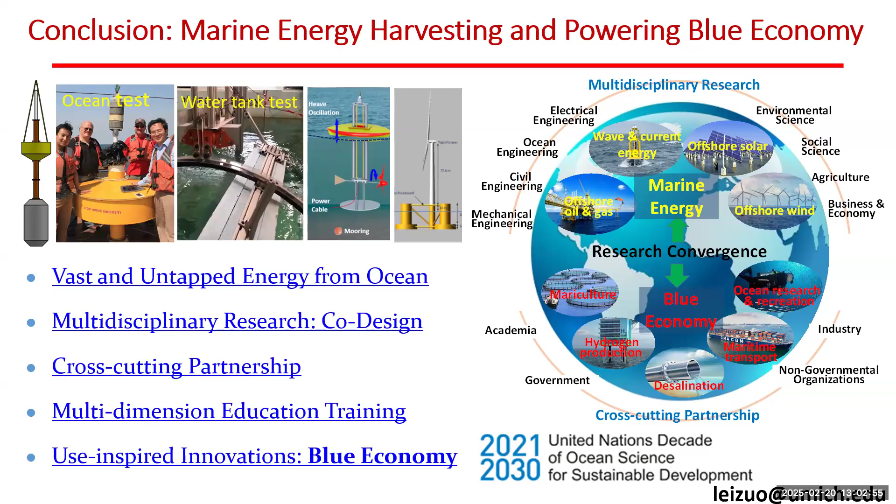Okay, so with the wave glider design that you showed, is the goal to generate power by embedding a generator into the system, or just to generate thrust? Let me say that way, there are two purposes. One is drive, right? We want to drive the system by wave only. And another thing, generate energy. Once we drive into a certain location, we can change this control, make it closed, right? We don't drive the system. Now when this buoy moves up and down, the cable now drives this generator.

So we want to do two purposes. Here we put a cable, and we can even put hydrogen in this system, whatever like that, right? This can become autonomous rescue. You need to deliver electricity, you need to deliver hydrogen, I put this in to navigate to your place, right? So similarly here, two functions: one is propulsion, another thing is energy harvesting, right? Some boats just use passive hydrofoil to drive, they drive them, move them around. This one is close to the ocean surface, therefore it's more like wave interaction. This one is in deep water, therefore it's more like a kite, when you pull that it moves. Which one is best? I don't know.